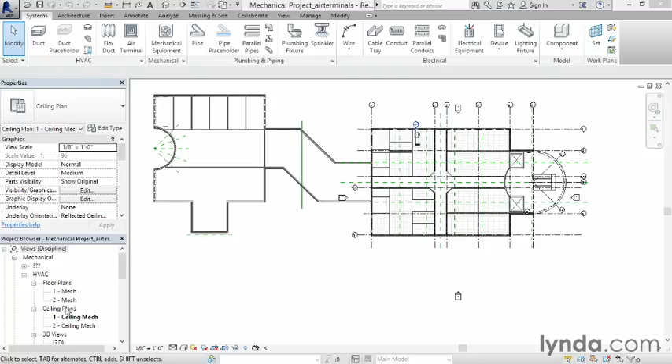We're going to add an air terminal, but then we'll establish what the ceiling height is before we place the terminal. Then we'll change the CFM that the terminal is responsible for. To get going, let's go to our HVAC, Ceiling Plans, One Ceiling Mech. Let's zoom in on this area right here.

Like I just said, we're going to put in an air terminal, but we don't know what that ceiling height is. If we go to the Annotate tab, and if we click on Spot Elevation, we can then hover over the ceiling, and it's going to give us our ceiling height. We don't need to place the tag in, but it's nice to just hover over it just to verify what the ceiling height is going to be, 8 feet. Hit Escape a couple times.

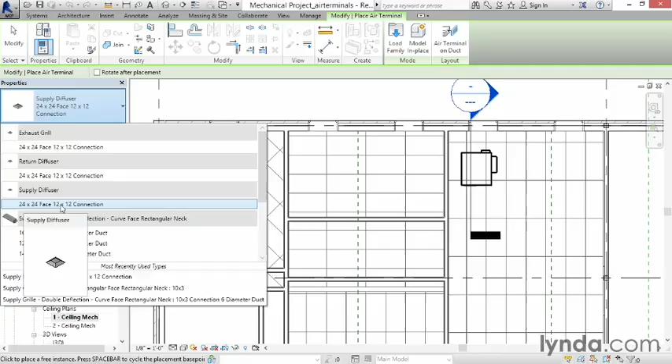Now on the Systems tab, let's click on the Air Terminal button on the HVAC panel. Let's select Supply Diffuser, 24 by 24 face, 12 by 12 connection. 12 by 12 connection is a little bit big, so let's click on Edit Type. Let's duplicate. Let's give it an 8 by 8 connection. Let's get rid of the number 2.

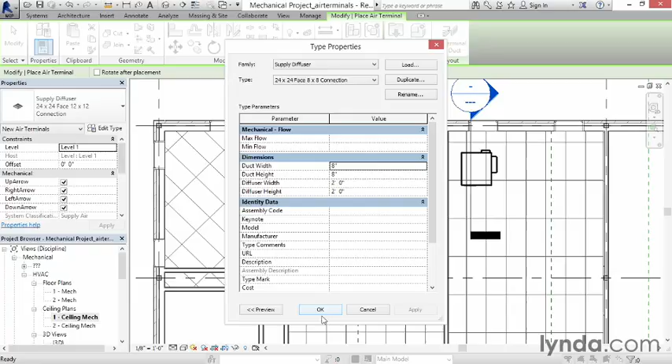And let's hit OK. Let's change the duct width to 8 inches. Notice the duct height is going to change with it. Click OK. Now again, notice that we can't really see it. So what I want to do is, in the properties, let's set the offset to 8 feet. This is what we verified the ceiling to be at.

I'm going to put an air terminal right here. Then I'm going to hit Escape a couple times. Go ahead and select your air terminal. Let's click the Move button. Let's move this air terminal from this endpoint to this midpoint.

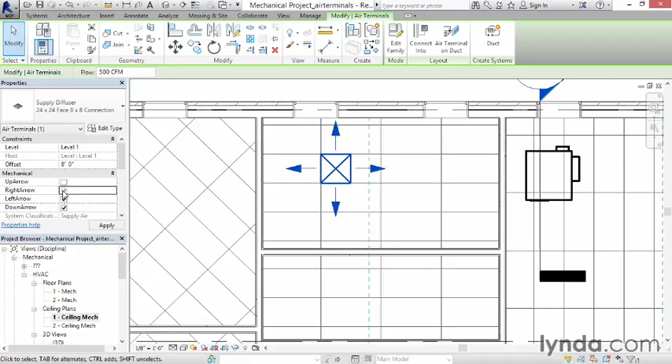Let's also turn off all of our arrows. With the diffuser still selected, under Mechanical, uncheck Up, Right, Left, Down, and hit Apply. Hit Escape a couple times. Go ahead and select your diffuser. Right-click on it, and let's Create Similar.

Again, notice that our offset is set for 0 feet. Type in 8 and hit Return. And pick the same point. Select your air terminal and move it down.

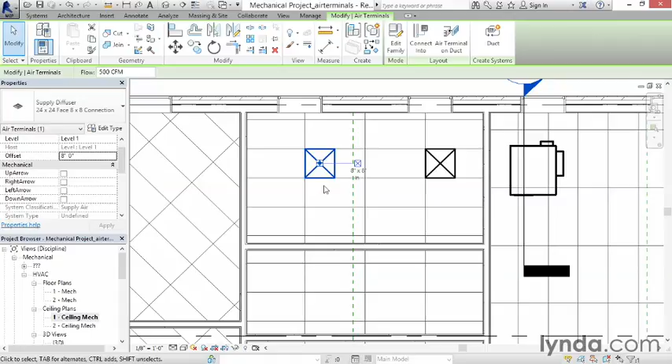A quicker way to do this is to simply copy the air terminal. Select your air terminal, click the Copy button. Let's copy it down to here. Let's hit Escape a couple times.

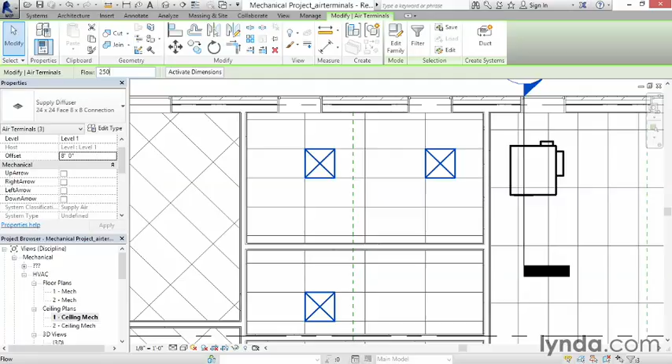The last thing we should do is change the CFM. With the Control key down, select all 3 of these terminals. For the flow, let's change it to 250 CFM. Now that our air terminals are in place, it's just a matter of connecting the dots with our ductwork.